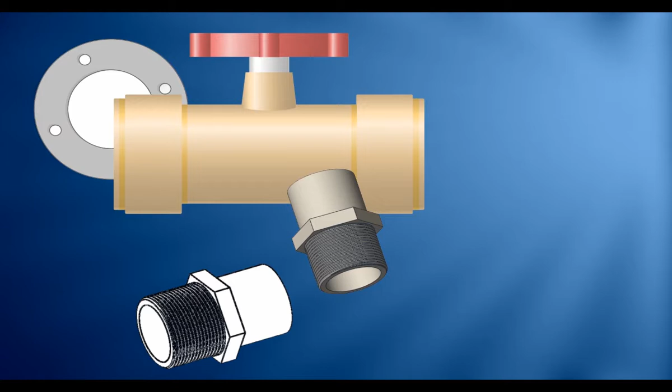In this video, we are going to model a uPVC union from a tracing of the same so that we build it back to this shape that you are seeing here.

A union actually is three parts. There are three bodies: this side is the end connector, then we have the union nut, which is the middle part, then we have what is called the body, which is on the other end. This one locks onto this one using square threads between this interface here.

Both sides are threaded, and this side is 1 inch, and similarly to this side. In between the two, this face and this face, there is an O-ring which makes sure that there's no leakage when the union is in use.

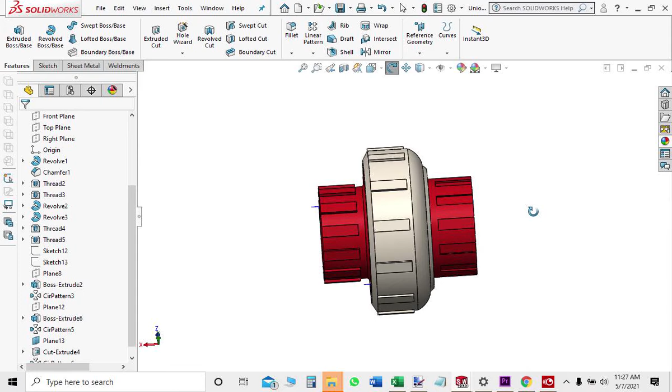We want to sketch these three parts, the yellow, the blue, and the gray part, which are different components of the union. I'm going to speed up the video during the tracing process so that we can shorten the period.

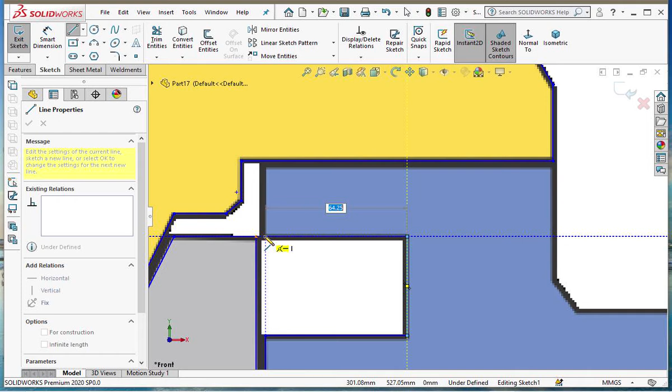So there we have our sketch.

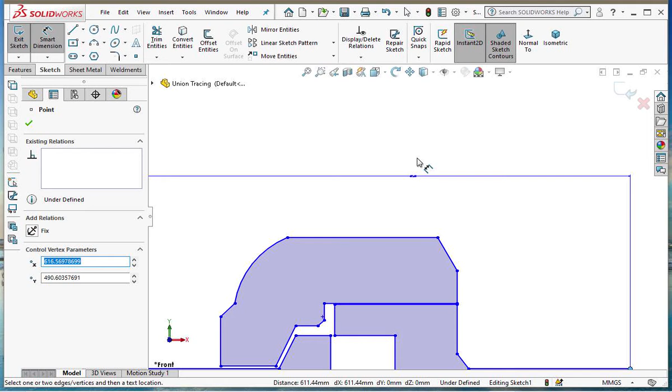Now we're going to scale the tracing. To begin, we need to find the distance between this point and this point so that we can use it for scaling the drawing. With that, I shall go to Smart Dimension, get these 2 points, find out the length, and that figure is 611.44.

So I'll get out of that and escape so that we go back to our drawing.

So we go to Scale, and Tools, we Scale, then we select the entities, remove that, we select all these entities.

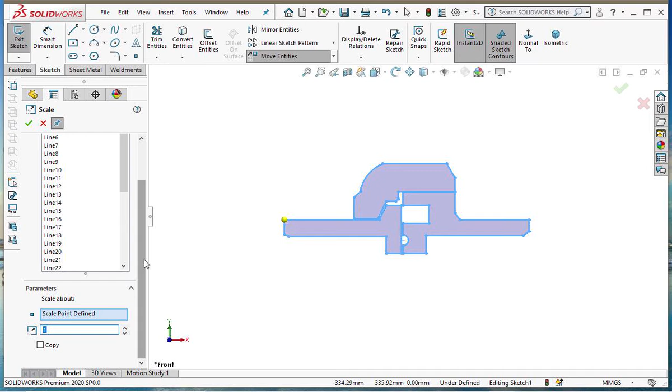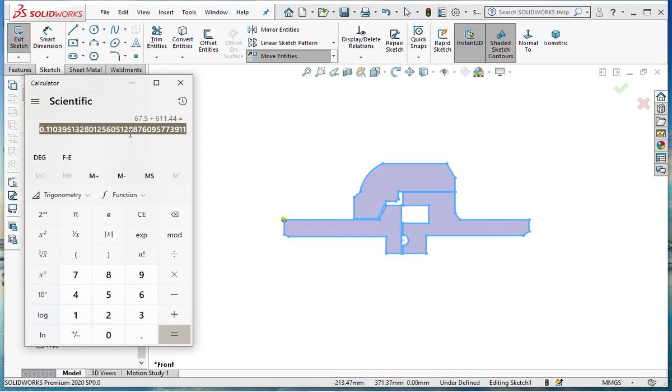And there is our new scaled drawing, and I can check now the distance between this and this, and we see that it is 67.5.

So we can check some relationship just to make sure that everything is fine. However, just to check also some other distances, this and this, that is close to what we have.

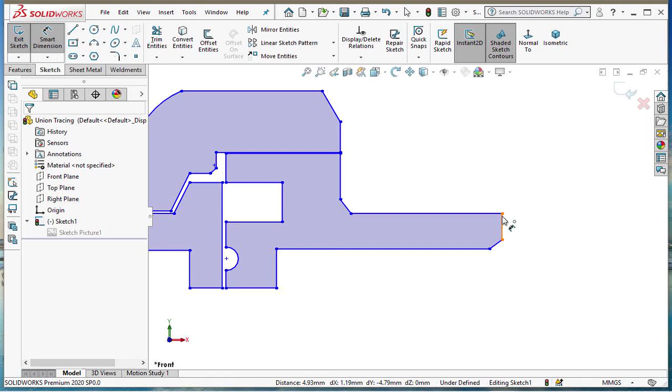This side, so I'll make this side equal to the other side, and we get it, the correct measurement is on this side. So this is going to give us 4.93.

I'll go back to this side. Just accept. This side. Accept.

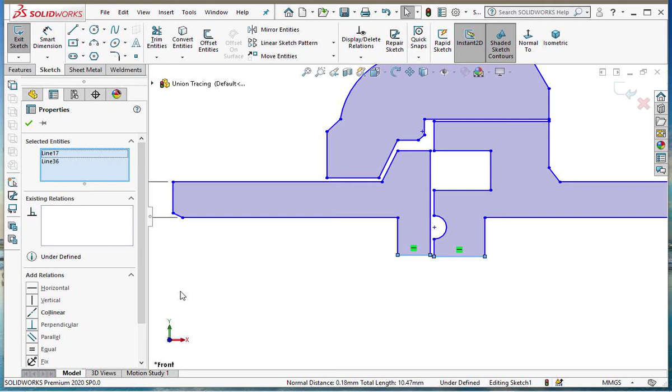Now these two lines are collinear. It's not a dimension. This and this, they are same. Accept.

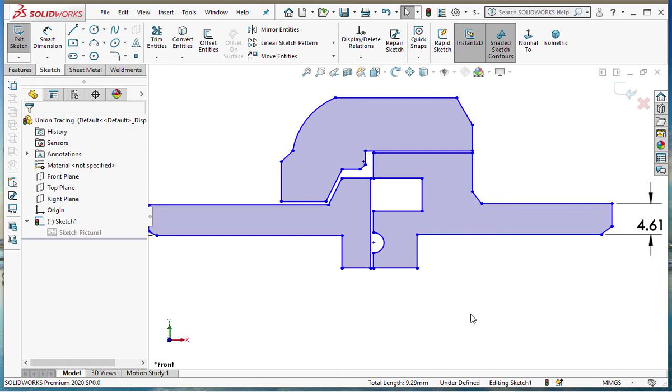These two should be parallel. Then they're collinear. And basically with that I can let SOLIDWORKS do the calculation.

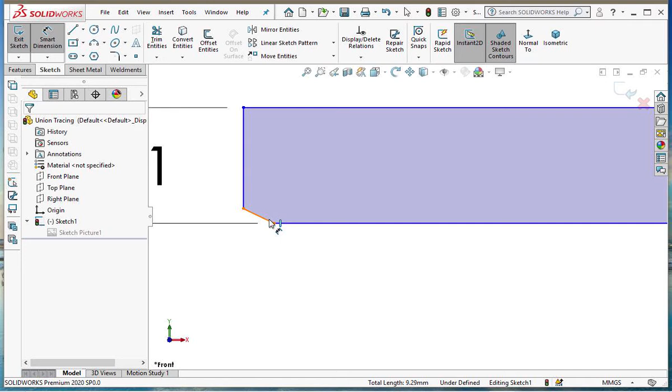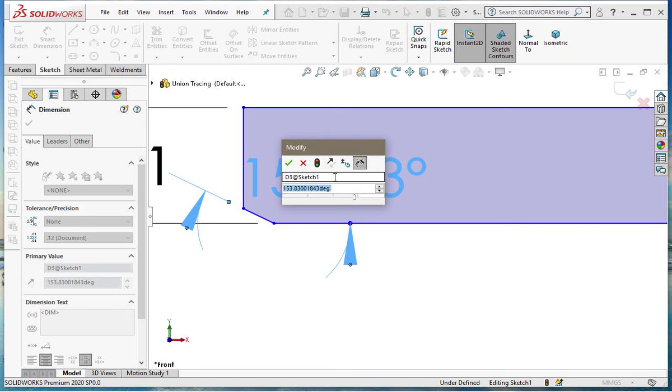Apart from, let me correct this angle here. 150. Because that one is 30.

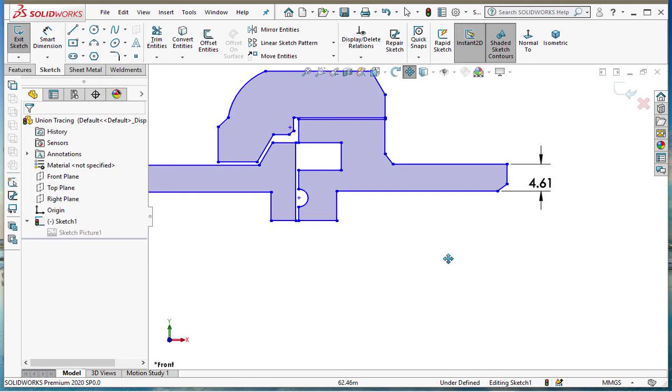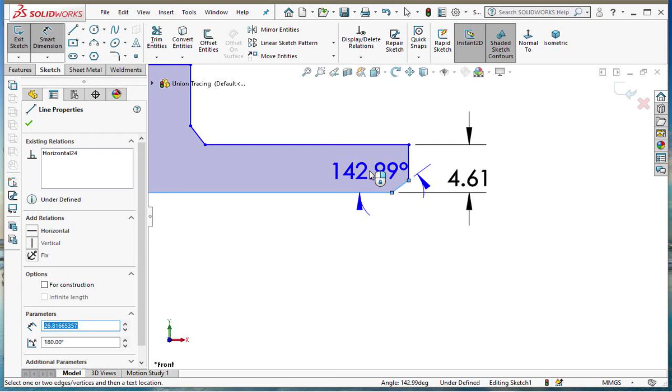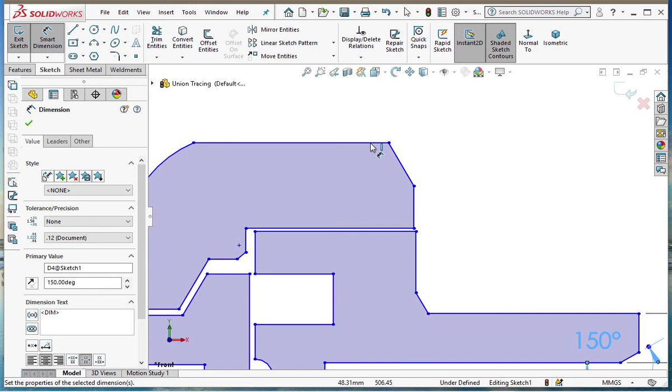Similarly, this and this. Make it 150. Let's measure this angle also. This is 120.

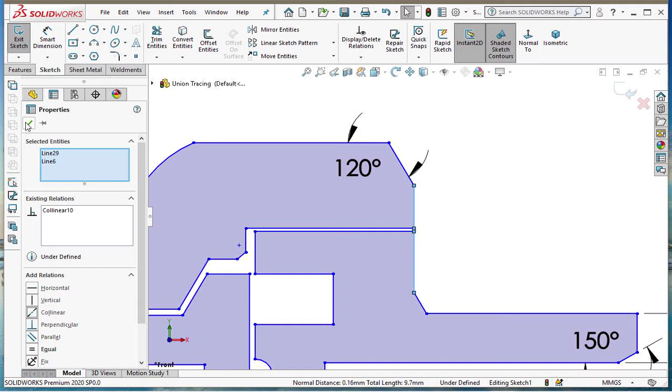These two lines are collinear. And I think with that, our diagram is looking good.

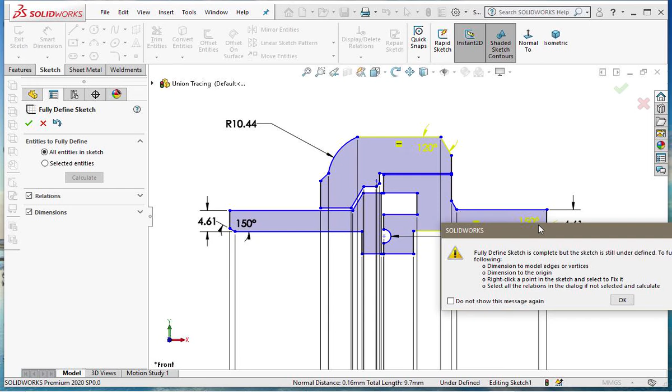Let's see if you can let SOLIDWORKS define the other. Okay, still underdefined. So accept. After going through a cleaning process, I now have the diagram fully defined.

As you can see, I need to draw a line from here. This is a construction line. This line is horizontal and it's for construction. Accept.

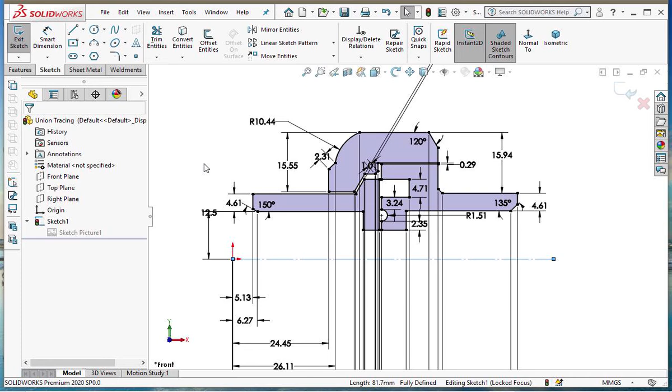I'll check this distance here. That distance is not correct. I need to change it.

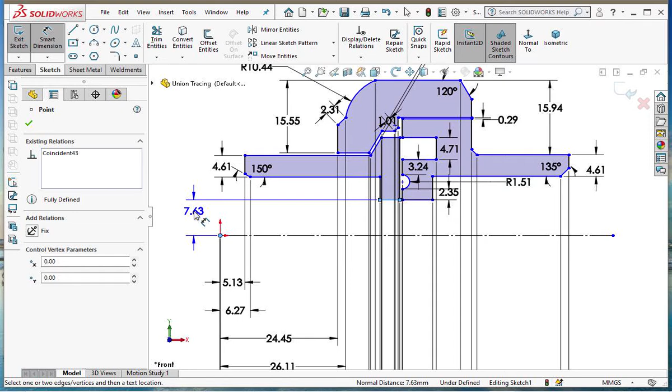We need to dimension the distance between this line and this one, and this distance is 12.5, which is half the diameter of the union.

So we accept that, and on this side I'll add 0.55 to that dimension to give us 5.16. So essentially that brings this one and this one at the same level to this line. So with that, I exit the sketch.

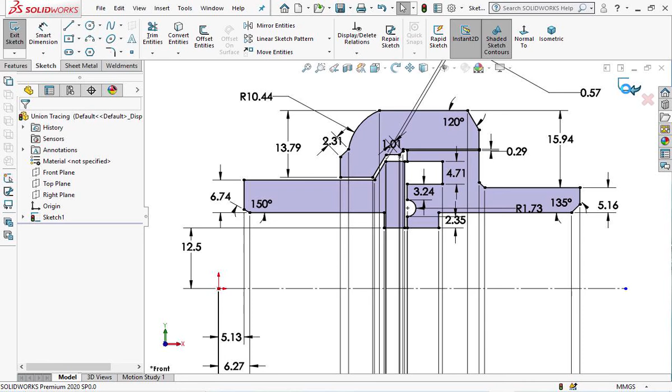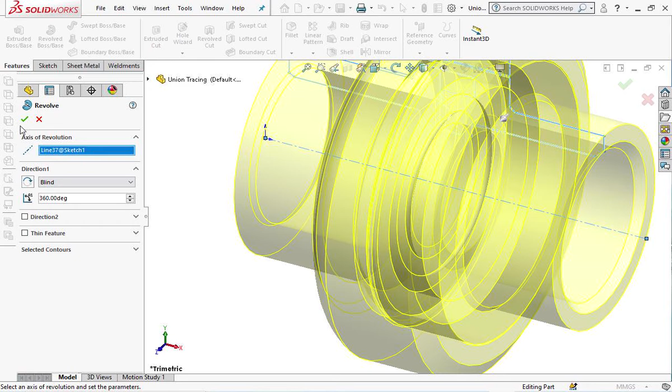We want to do a revolve boss. Our axis of revolution is this one. Then we accept.

So this is our union. Within it, it has 3 bodies. If I put off these 2,

you can see this is the outer nut. We shall later on put a square thread on that surface.

Then we have the next body. This is the end connector, and it has a slot for an O-ring. This inner surface is going to be threaded.

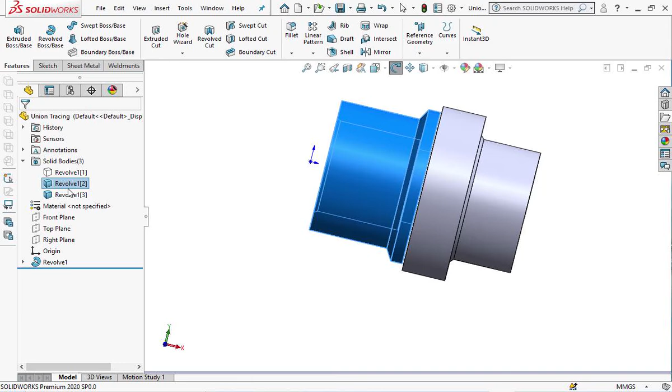Then we have this other part. If I put this one off, so this is the one which presses the O-ring to ensure that there is no leakage in the interface between the front side and the back side of the union.

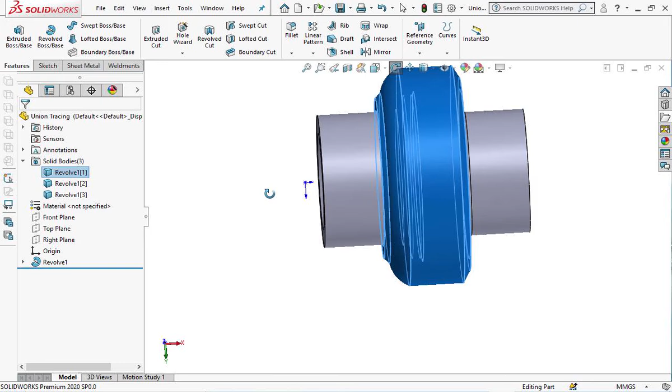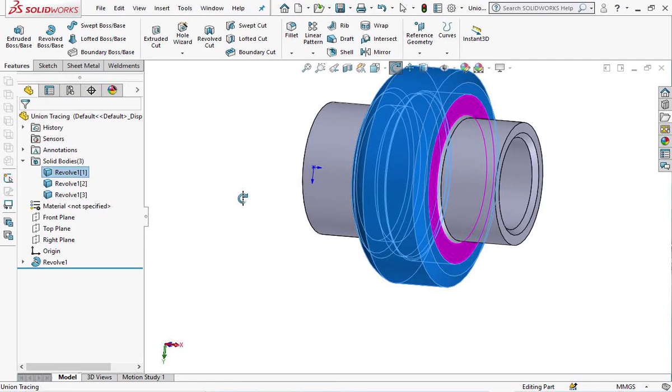So from here we shall proceed to make threads. There are 3 threads to be done: this face here and this side, then the threads on the union nut and the end connector surfaces, the interface where they are joining, and that is going to be a square thread.

For this part we are making the threads, so I shall go to the thread wizard. Accept. Then the location is this one.

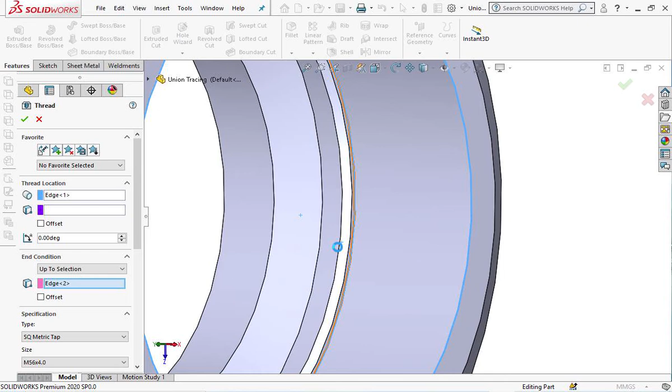And we want this location here.

So that is our diameter, but I want 4 millimeter, and we are using the square metric. If you don't have this one, follow my video on how to set up the square metric tap in SolidWorks.

Here we are going to cut the thread. Okay, whenever you get this error, sometimes the solution is to chamfer this edge. So let me chamfer this edge.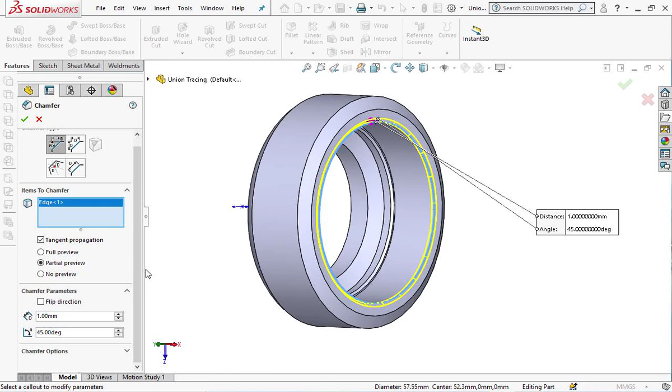And let's adjust it to 1, small chamfer. We accept that. So let's now try the thread again.

And the location is this one, up to there. And that is the diameter, and that is the pitch. So we try to cut,

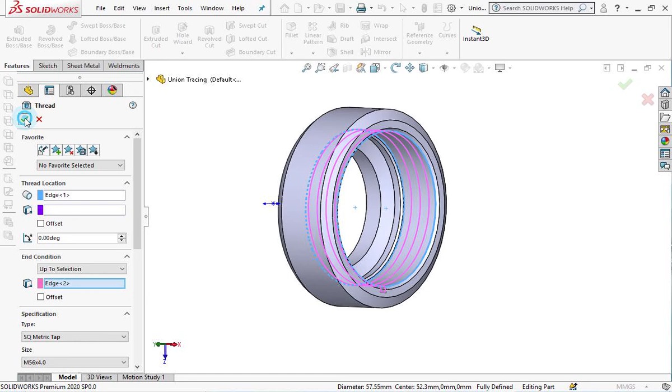and you can see it as accepted by just changing the end conditions there. So those are the threads. So we accept this.

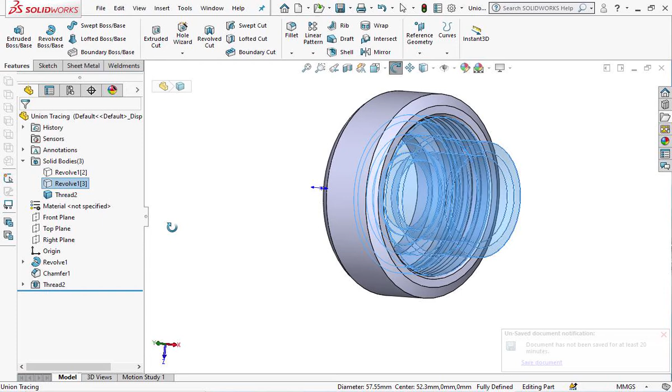Now we take this one, and do the threads as well. So I'll activate it, then put off this one. Then now I'm left with it.

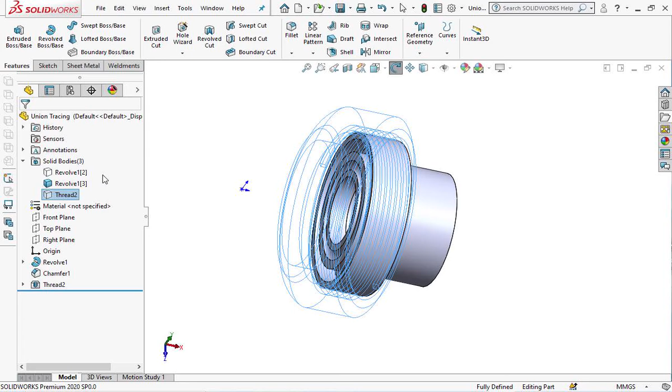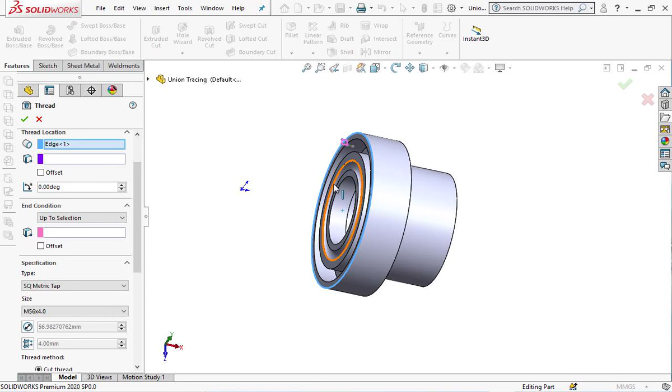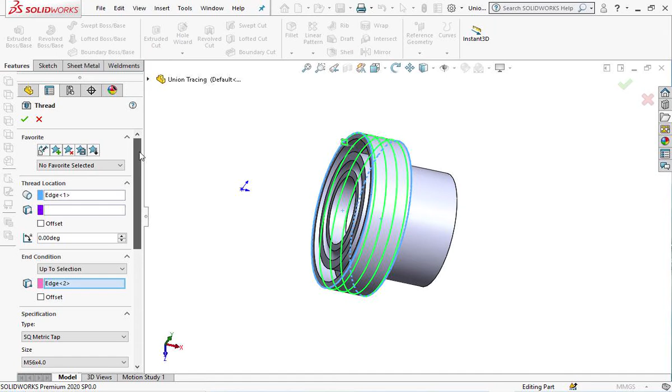So we shall also use a tap, but this time we are going to extrude the threads on that surface. So again, thread, so location is this point, and up to this point, and we want to extrude, accept.

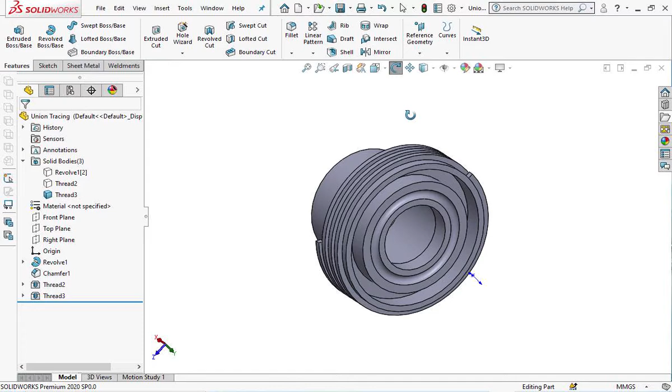Now that is our thread. Okay, I need to offset it on the last part there, inside.

So we edit it, offset it inside. By say 0.5, so that it doesn't spill outside, or half the pitch, which is 2.

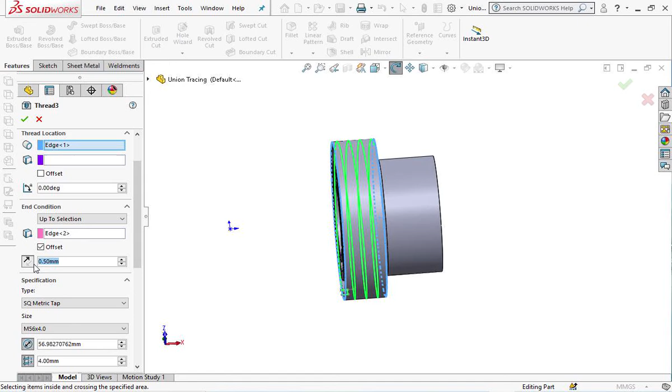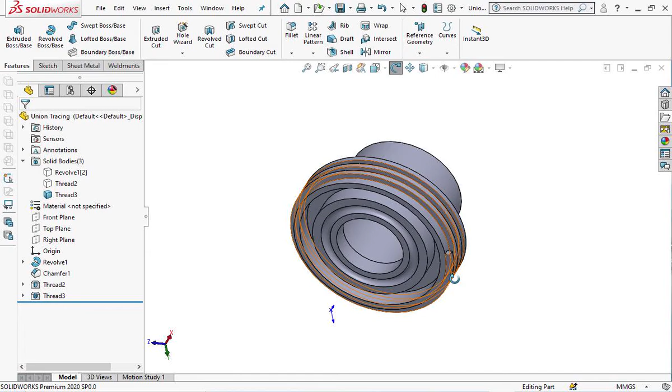Yes, let's accept that, and let's see how it looks like. So it doesn't spill over. Now this place here, we are going to

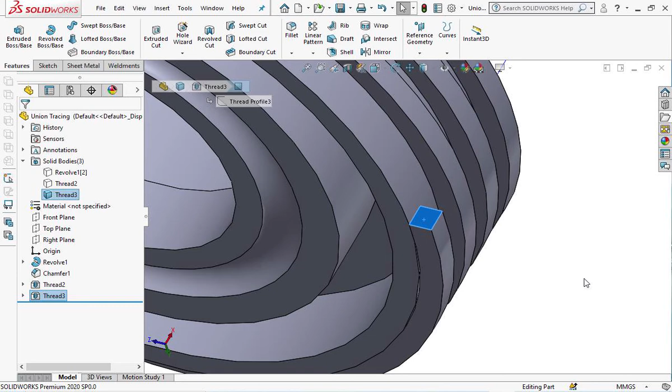modify that, and what we want to do here is to do a revolve boss there by first of all converting those entities. So I will convert the highlighted entities,

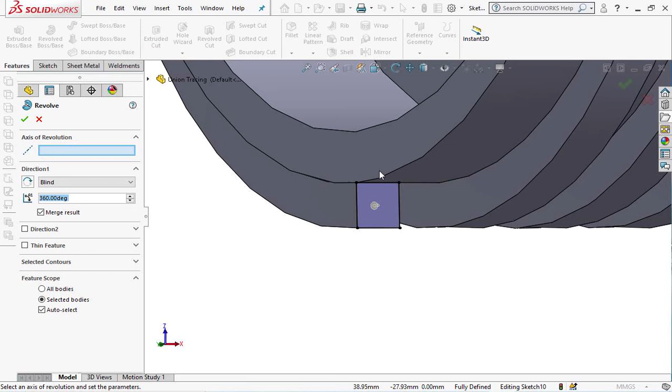then revolve that entity so that it gives us a curved finish. So let's do revolve boss. Then it is asking what is the axis. It is this one here. Then the degrees I just want something like 120. Yes, and you see with 120 it enters into the body of the nut. So let's accept that and see how it looks like.

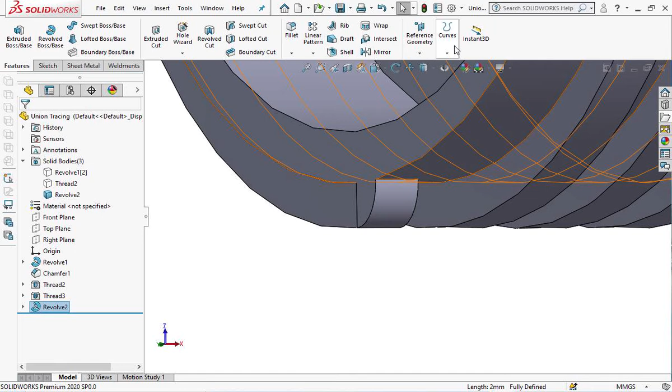And you can see that the finishing of the edge there is nice compared to the way it was before.

Similarly, I'll do a similar on this side. We need to convert entities. Then using that, I will do revolve boss. Then the axis of revolution is this one. Then the degrees is 120. And we accept that. Accept.

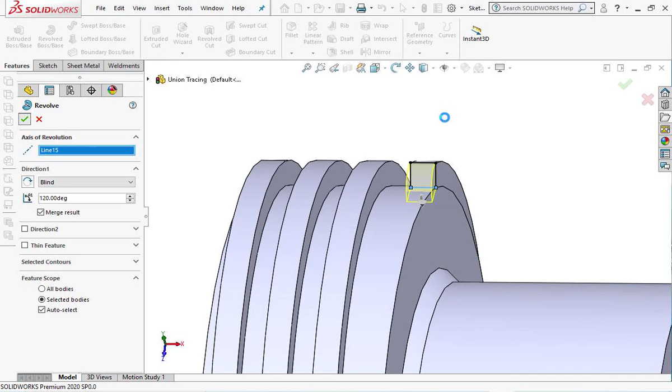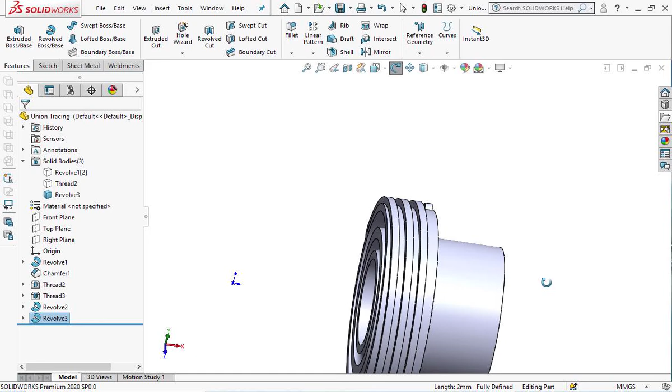And so you can see the nut is having a nice finish. So we accept this. So the nuts on the male and the female are now done.

Now we look at the inner threads, which is this one here, and this is going to be a normal thread. So we take thread

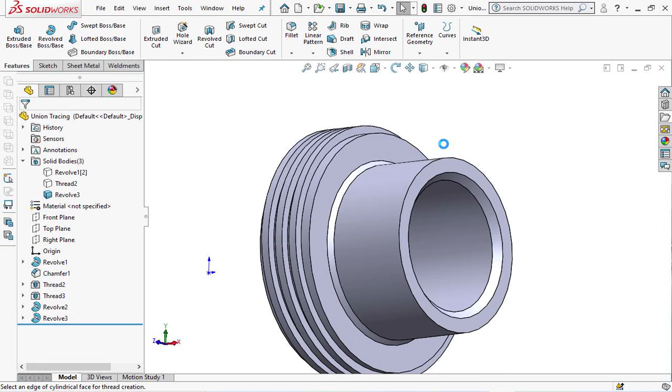and also we shall do a tap. It is asking which location, at this point, up to this point, and the diameter is that one. So this is not a square this time, this is just a normal tap.

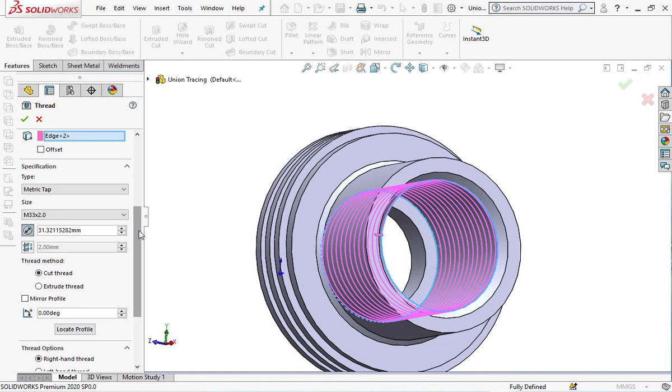And that one is close to that. To be precise, here's the thing, it has taken it. So let's see how, just before we accept everything. So accept.

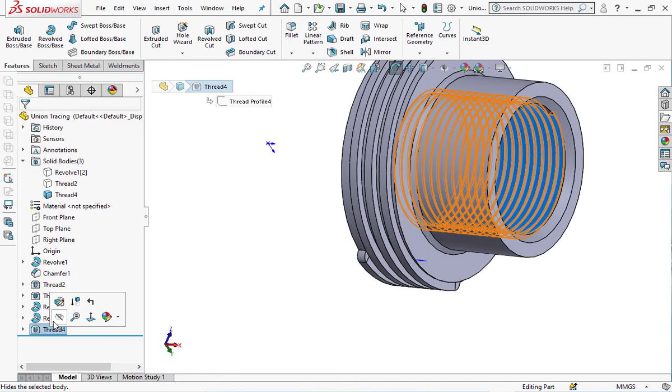We need to modify that thread. To give it an offset, inside.

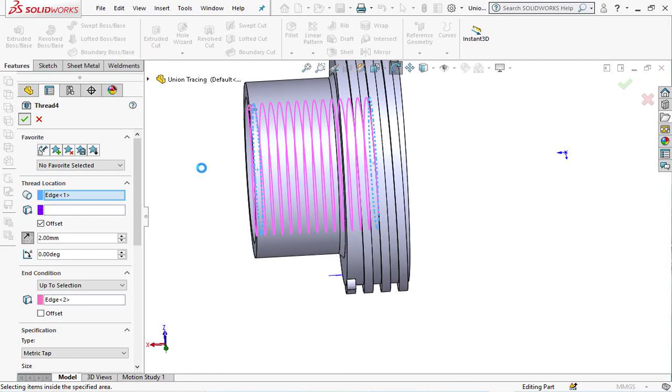Okay, somewhere there, so you accept that. Yeah, so that is our thread entering nicely into the nut. So that one is done.

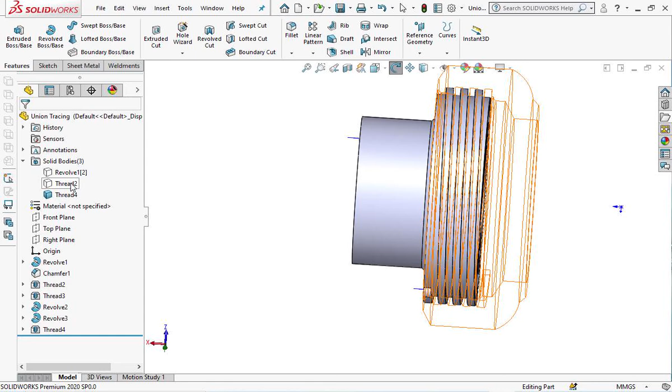We take this body, and we also do a similar thread. Okay, there we have it.

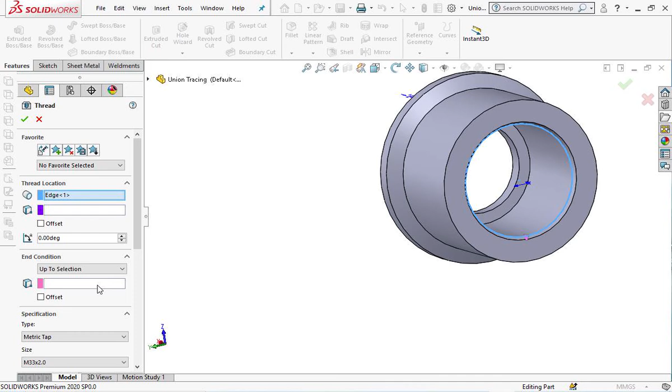Then we put a thread. The first location is here. Second location is there, and with the same definition.

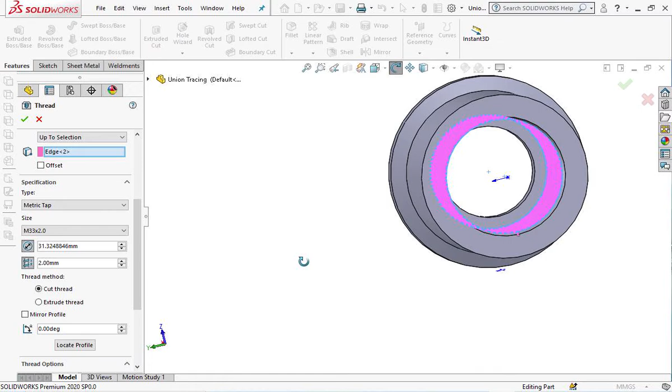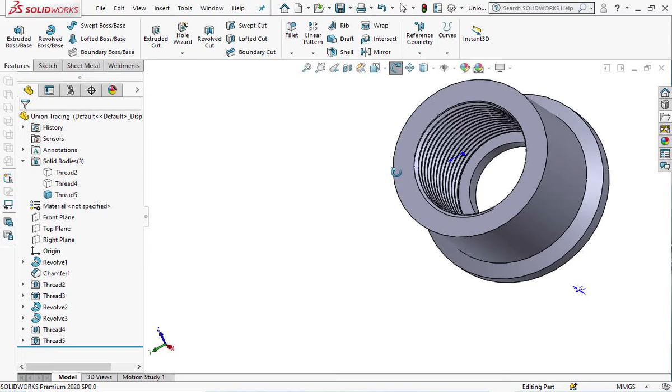Let's make an offset. Accept. Yes. So now our three bodies have threads.

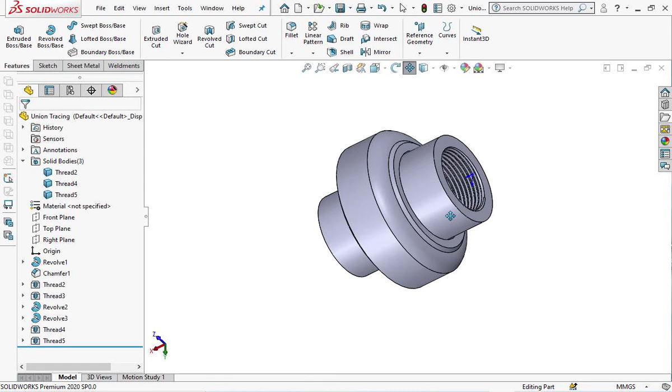So the other thing that we want to do is to emboss this surface and these three surfaces from here, this one, and this one. So from here, we are going to create some feature on this outer surface to provide grip when the union nut is being turned. So you can see the surface is very smooth.

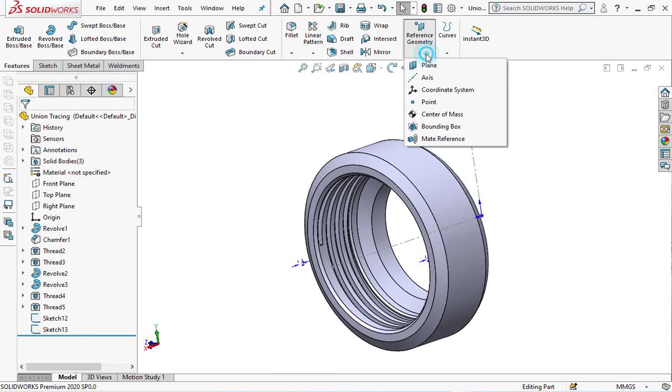So what I want to do is to create a plane first, then develop the gripping body on that surface. So we go to plane, then I select this one here, then accept. So our plane is there. So let me make it normal and sketch on it.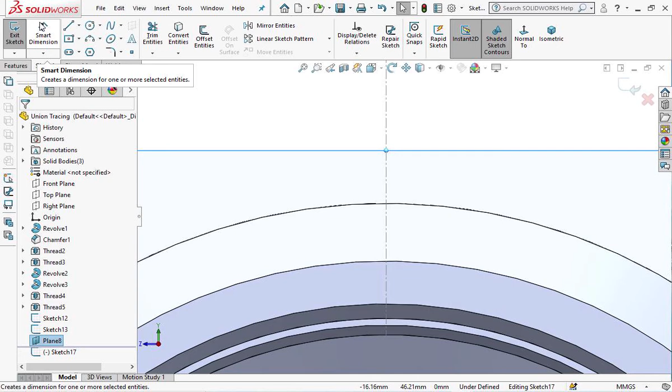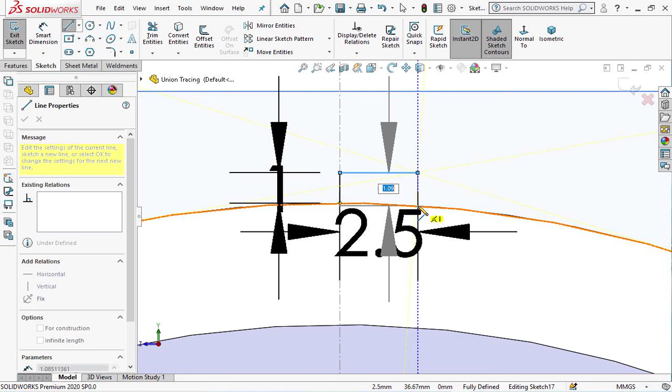So it is here that we want to draw, and this body is just 1 millimeter. So I'll use a line, and from here go up 1 millimeter. Accept. Then go this way 2.5. Then come back to the circumference of that circle, there. And we get out of the line tool.

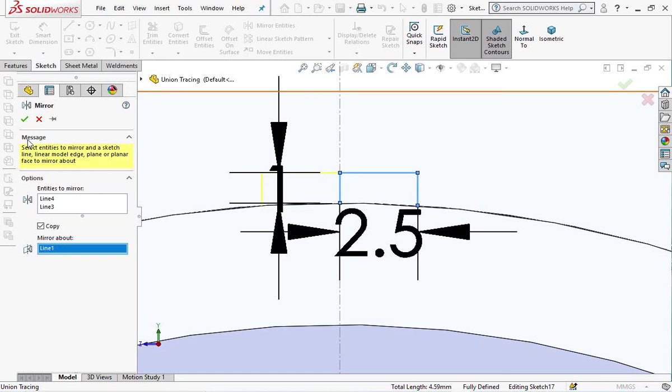So now we want to mirror these two lines, this one and this one. So mirror entities, and we want to mirror about this line here. Accept. Then we create this arc here. So I'll go to the three-point arc, then pick this point and this point, then drag our arc to match that line, and with that we have our body. So we accept that,

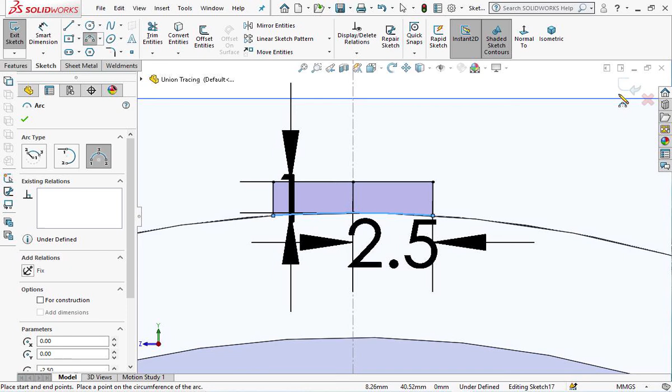and we want to extrude that sketch. So we want to extrude it to go towards this edge here. Then we select extrude boss.

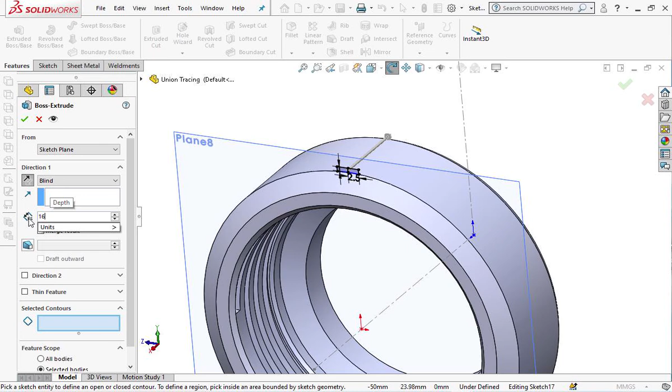Let's reverse the direction. Then we want to go to about 15, let me say 16, and the selected contours. Let's zoom in and pick that and that. Alright, yeah, then there we have the body.

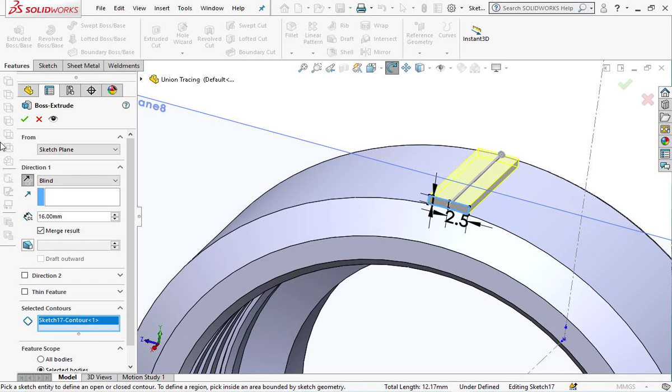Okay, so we accept this, and you can see now, if I make it normal, let me turn it to the other side.

So we want to do a circular pattern around the edge of the union nut, and with that we select it, then go to circular pattern,

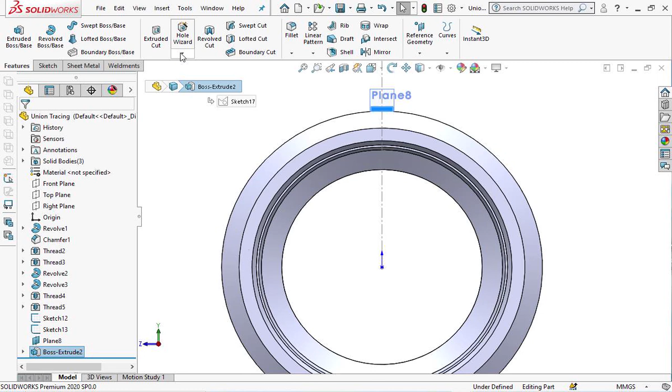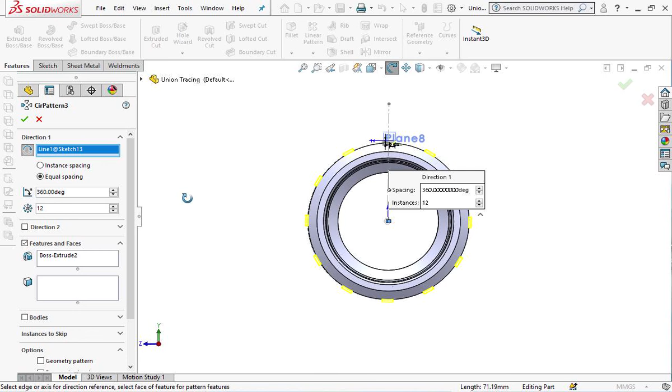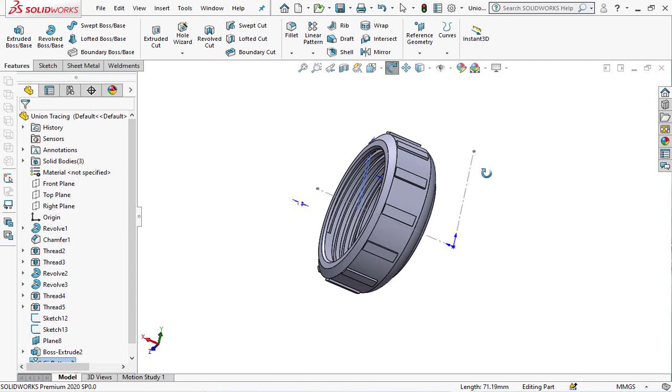So we shall do the same on the end connector and the body of the union. So essentially that is the union.

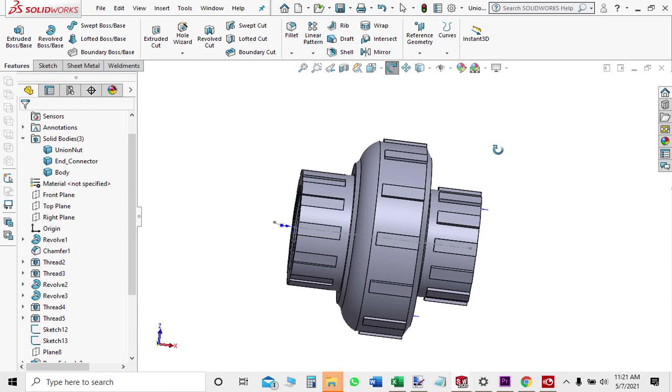It was a sketch because we did not have the actual dimensions, but out of the sketch and tracing, we have been able to build it back to a model which can be fine-tuned and worked on further to improve the dimensions. Thank you for watching.